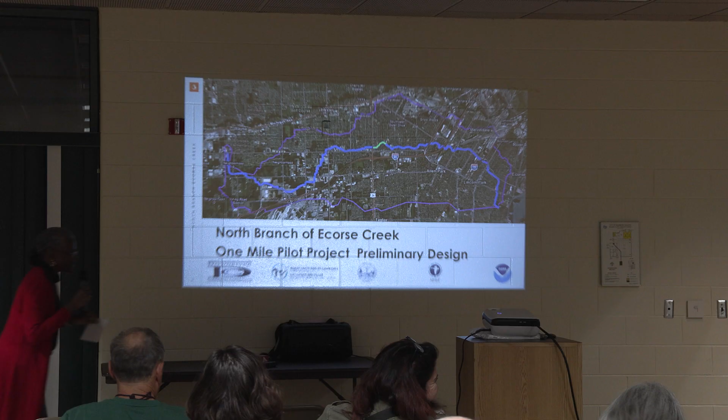Thank you. Hello, everybody. Welcome. We're very happy to have you all here today. This is a collaboration that we've had thanks to Mayor Bazzi. He joined the Cities Initiative organization about 3 years ago, and he has been collaborating very closely with DCC. And they got selected for this pilot project that you're going to get a presentation on today, which is going to benefit all of our residents and the Ecorse Creek floods that we've been having for years now.

I also want to mention that our city engineer couldn't be here, same as the mayor. They're both at our conference today, so they couldn't attend. But any questions that you have, I'll be happy to relay them to them, and they apologize on behalf of that. With the city engineer, he also wanted to mention that this is just one of the many projects that we have ongoing right now for flood mitigation along the Ecorse Creek.

One of the biggest ones that is happening is the $10 million that Wayne County is putting towards the cleanup that we have. That is not what you're going to get a presentation on today, but it is one of the projects that is ongoing all along the entire Ecorse Creek for maintenance, as well as the projects that we have in collaboration with our community and economic development, which are for the acquisition and demolition of homes in the Ecorse Creek floodplain.

So if any of you is interested in participating in those, we have 2 grants that have already been awarded that cover over 40 homes that we're going to be demolishing in the next 2 years. And we are applying for a 3rd one right now. So if you know of anybody that is interested in selling their homes because they're constantly getting flooded, please go and see our new economic development director, Ms. Layal Saad. Can you say hi? She has some forms for anyone that's interested.

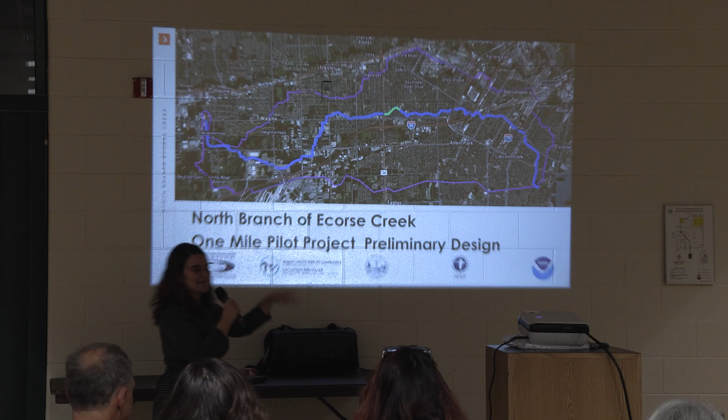You can share it with your neighbors, or if you're interested yourself, you can apply, and we will be happy to put your home in for the next batch of grants that we're receiving. But we're very excited to have the DCC group here and the Cities Initiative Commission presenting the project for the One Mile project we have here. I'm going to introduce Ms. Jasmine Dancy from DCC. She's going to be the main speaker today.

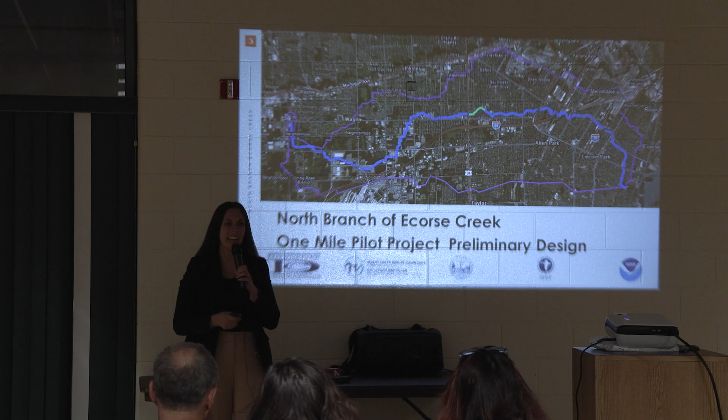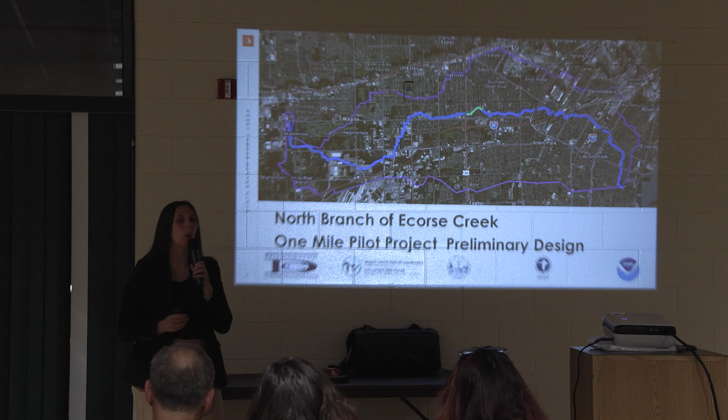I'm with the Downriver Community Conference. The DCC has been around for close to 40 years. We're a consortium of 20 cities in this area, all along the Detroit River, all the way west to Romulus and Huron Township. We work collaboratively on regional issues. Our partnership has been with the Great Lakes and St. Lawrence Cities Initiative. Mariana mentioned that Mayor Bazzi is a board member of that organization. We're thankful to have his leadership represented on this international organization.

So the Cities Initiative, we've been working with them over the last 2 years. They provided grant funds for us to advance different efforts into the design phase. So we all know that there has been an extensive amount of planning done on the North Branch of Ecorse Creek. We lean on those efforts that have come from the Army Corps of Engineers and from Wayne County to inform our work. So we're all working collaboratively together to advance these projects.

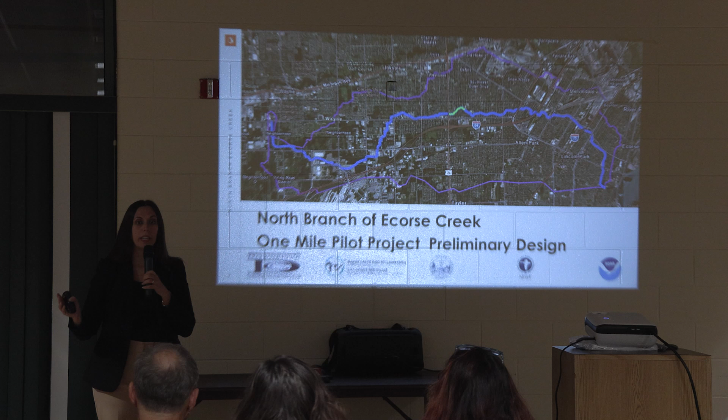So we know that the Army Corps has recommended a huge plan across the whole North Branch of Ecorse Creek that would probably cost upwards of $800 million to $1 billion to do the whole Ecorse Creek revitalization. And knowing that that is such an immense undertaking, our strategy has been to start to break that proposal into smaller projects and take bites out of this problem that's been happening just to start to get some solutions actually happening.

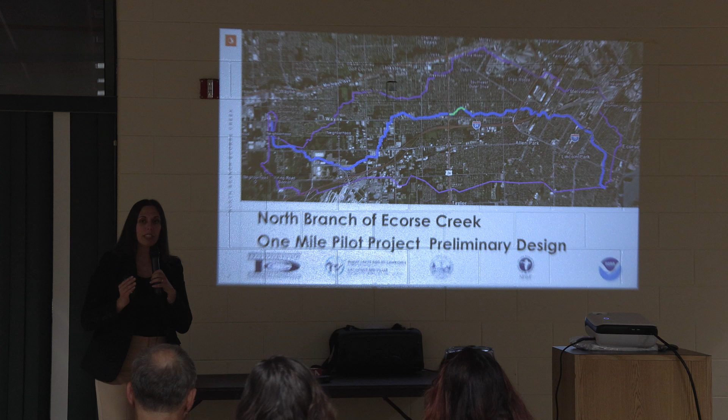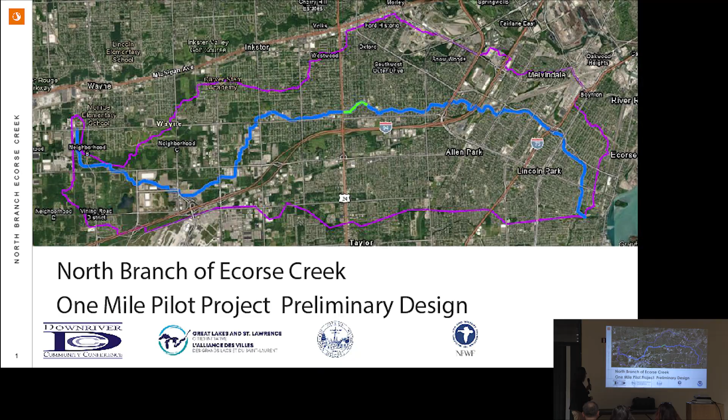So what you're going to hear about today is a 1-mile pilot project for design. We're looking at a 1-mile stretch on the North Branch that is going to be advanced first through this design phase, and I'll talk about the timeline more at the end, to get to implementation and construction in the future. So this should look familiar to you folks.

So here, this is just an overview of the whole watershed, but what I'm going to go through here is a kind of layered approach, and this is what is informing our work across the whole Ecorse Creek watershed. We're going to be using the goals I'm going through as a lens for how to choose and advance and prioritize projects and the results that we want to eventually get to.

So the primary goal is, number one, flood mitigation. We know that that's the concern of our property owners and our friends at the Drain Commission. But we also want to take into account ecological health, and I want to point out our friends in the back with the Friends of Detroit River. They have been a great partner in this watershed and have done a lot of important work that is helping us in this process.

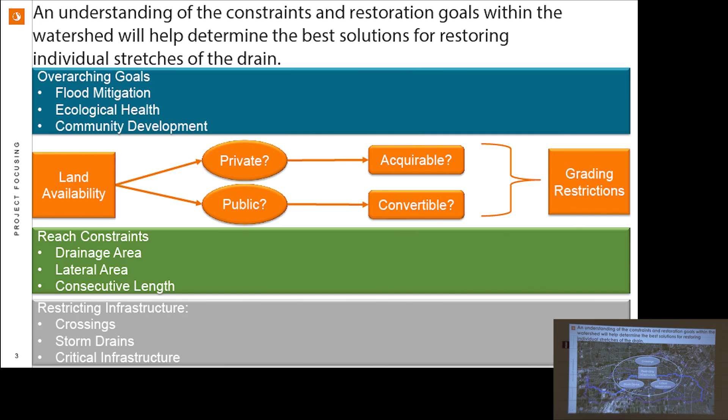All right, so here is our map of the actual 1-mile pilot project. We're really excited to share this. The left boundary here is Telegraph Road. About the middle of the way where the line changes from green to blue is Madison Street. And then you keep going east through Heather Lane Park there. So that is our 1-mile stretch.

Anybody have homes in that area? Okay, a couple of you.

Thanks for coming. So I'll go through, we kind of have it divided at that Madison Street. Like I was saying, west of Madison Street, we don't have as much available land. The properties are really closely abutted to the creek. But as you go further east, with the properties that have been acquired and demolished in the past, in that much larger Heather Lane Park area, you have a lot more land to work with.

So we have it divided into what we call in-line, so in line with the creek improvements to the west, and then offline, which means actually looking at taking the water off of the current creek when you're looking at that blue line to the east. So I'll go through that in a little bit more detail.

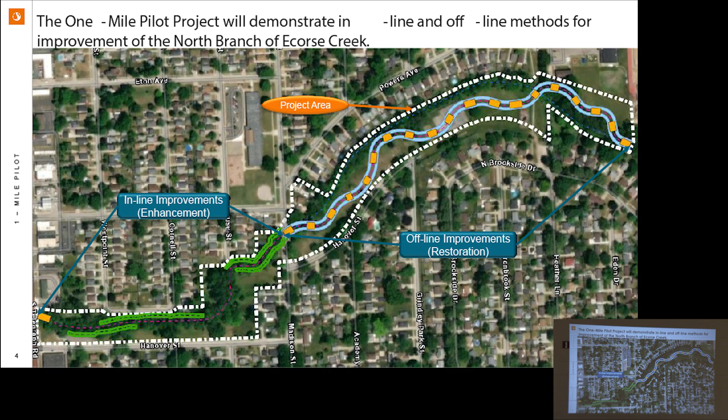So here's these inline enhancements. We have a couple, probably 2 or so different techniques that are proposed here in this design portion.

I'm going to pause and have my friend Ralph wave in the back corner. Ralph is our representative from our engineering team. We coordinate with, contract with Stantec Engineering through the city's initiative, and that's all been paid for through our grant program. I am just overseeing, and happy to be the public face, but Ralph knows these engineering details and can get into some of those more specific questions better than I can. So if anything comes up, Ralph is our guy for that.

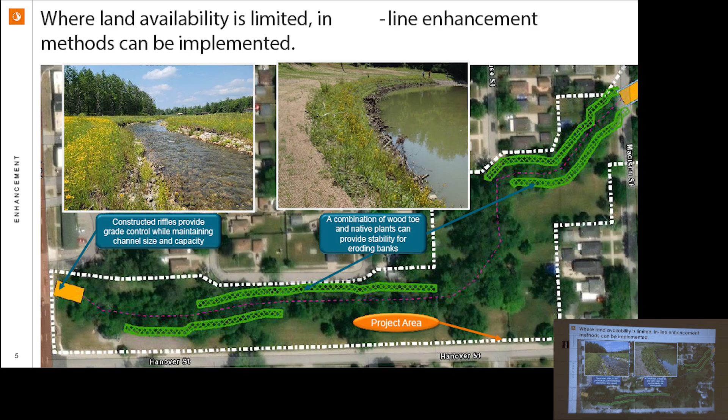So that again is the inline enhancement east of Telegraph up to Madison Street.

Now we go east of Madison Street, where there's much more room, so we're able to do some more substantial restoration practices. If you see the slight dotted line that follows along the top of that green area, that's the current creek — that's where the creek is right now. What we are proposing is taking the actual flow of the creek into the plain of Heather Lane Park and meandering it, creating a more natural type of stream flow.

What that does is give you much more storage for the water. It also slows it down, and those orange boxes — more of those riffles — are much more prevalent there. So it makes for a more natural, pleasing design.

In partnership with the city, they are looking at rehabilitating and redesigning Heather Lane Park with this design in mind. Imagine a beautiful meandering creek where the city can partner to add bridges and a more beautiful parkway with native plants in the area, making it a really interesting, dynamic parkway that also serves the primary goal of flood storage.

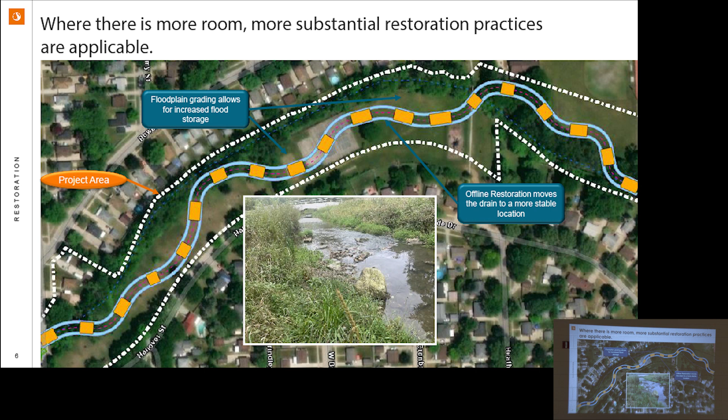This is the part I think is really cool and creative, and it fits the city's goal — having taken those homes out of the floodplain originally is what gives you room to do more of these substantial practices.

As we move forward, we're trying to take this big project proposed by the Army Corps of Engineers and break it down into little pieces. We want you to know we're keeping those original goals, as well as all of these additional options for what is appropriate for each piece of the puzzle. We're truly trying to take a comprehensive, holistic approach that meets all of those goals in a creative way as we move forward.

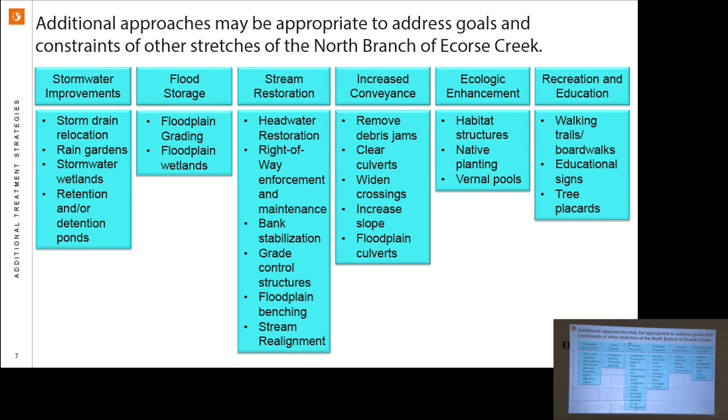So we are working as basically a whole North Branch Creek coalition from Romulus down through Ecorse. That is our vision for this holistic project.

Some of the benefits we believe will come from this specific 1 mile pilot project, once it gets through the design and construction process: number one, increased flood storage. We're protecting property boundaries and making sure the stream bank is stabilized so backyards aren't falling into the creek anymore, and reducing the maintenance required. We know Wayne County has their maintenance requirements and process, but these restoration techniques are designed to allow sediment and water to move freely in a way that prevents future sediment buildup.

Improving water quality, wildlife habitat, and recreation potential. We think those are all very important, and things you can see in a more healthy creek.

Once we get through to implementation, we're really excited to take what we've learned here and expand it to the rest of the creek. We see this as a replicable model that we can take downstream, upstream to Romulus, all the way through to the mouth of the river.

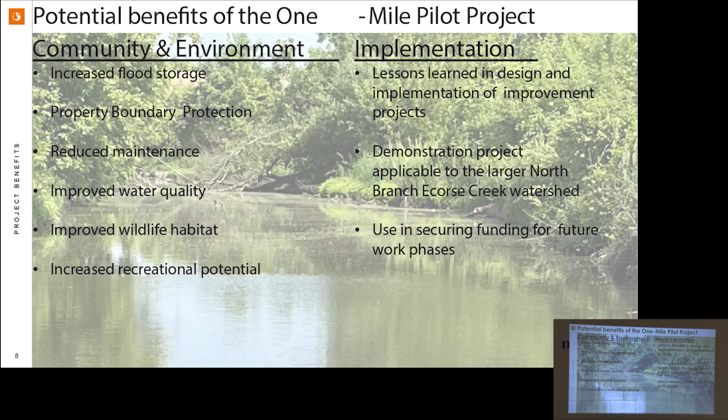We are working to secure funding in future phases. We're calling this a pilot project, a demonstration project, to prove to these big funding opportunities and granting organizations that this is important, valuable work for this area, and here's what else we need to do. It's really leveraging all of the work that's already been done here in Dearborn Heights and showing it to a bigger audience.

So with that in mind, we are finalizing this preliminary design in early next year. We want to take the feedback that we get tonight from you guys. We'll be taking questions afterwards, but also please feel free to write them on your cards or send us an email afterwards. We want to incorporate all of that. This preliminary design is not final, and there will be continued opportunities for community input and feedback as we move forward.

Once we complete this 30% design, as they call it, we'll want to take that through to complete design, engineering, and then construction. We need funding for all of those steps along the way. There is no funding allocated for those next steps currently.

I do want to be honest that we are utilizing grant funds as they come. The City of Dearborn Heights is being very proactive about securing grants for multiple projects, all for the benefit of the issues going on with Ecorse Creek. But for this particular one mile stretch, our team still needs to secure additional funding for the final design, permitting, and construction.

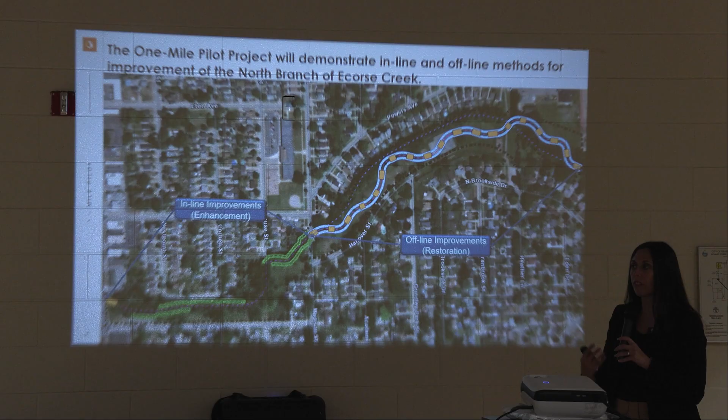So I don't want to speak on behalf of the city, what their strategy is when they are removing those homes, but I think FEMA's intent is, if you're moving homes out of the floodplain, then that is the mitigation work. But were other communities required to remove homes? Not that I'm aware of. I don't know for sure, but I don't believe so.

And Dearborn Heights is one of the hardest hit, so that's why FEMA gives you guys so much attention, because there's so much flooding here. We know that you guys are more at risk. But I don't believe there have been any other communities that have taken advantage of that opportunity to clear homes from the creek, though I don't know that for sure.

FEMA awards these grants to every community, though I don't know if other cities take advantage of it. I know historically in the city of Dearborn Heights, we have been purchasing homes for many years already, which is how we managed to have the piece of land that they're using as the pilot here. We continue to take advantage of that because our residents are the ones who suffer the most.

As I mentioned earlier, this is a voluntary purchase. We're not kicking anybody out. We're just offering the opportunity for those that are tired of the floods to relocate to a different location with the FEMA grants. We have been lucky that FEMA has provided an even larger amount of grant this year.

In the past, they would only do 75% of the cost of the project, and the city would have to put 25%. Those were the old houses that we purchased. The new batch that we're purchasing right now, which is the 40 ones that we have, they're actually matching 90% of the cost, and the city is only putting 10%. I don't know if other cities are willing to do that match for those grants. In our organization with our city council, they see the need for this, and they have consistently voted in favor of getting the residents out of those horrible situations.

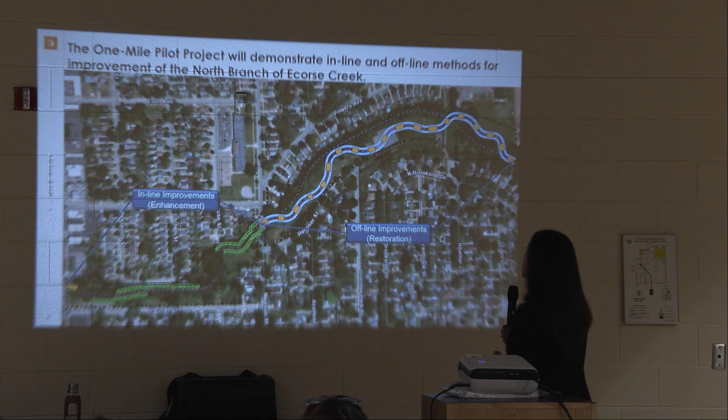There's another question? Yes. That map there in the lower left-hand corner, the project actually starts at South Telegraph, or does it not start until Madison? No, this is Telegraph here, right here. Madison Street is right here.

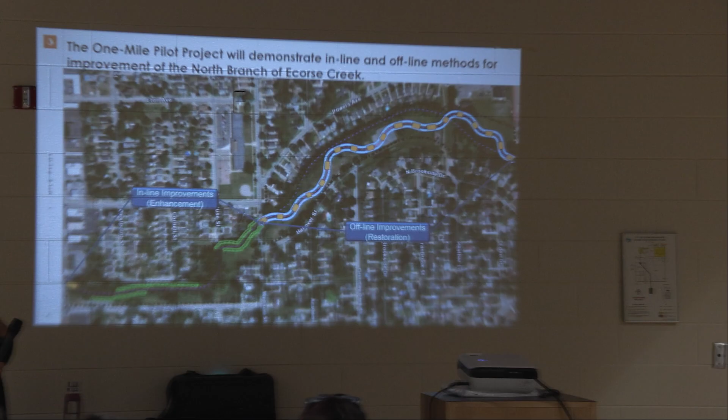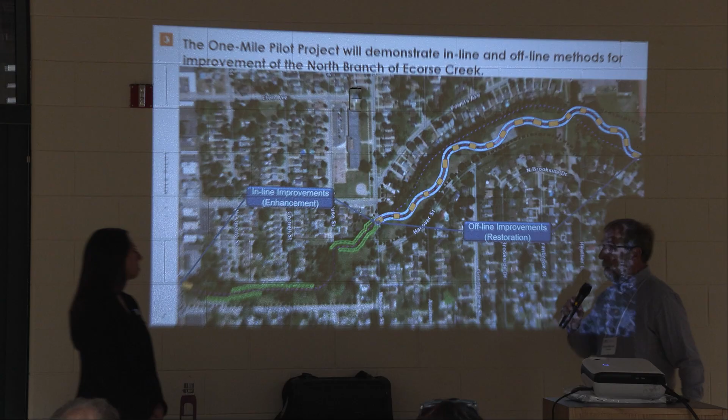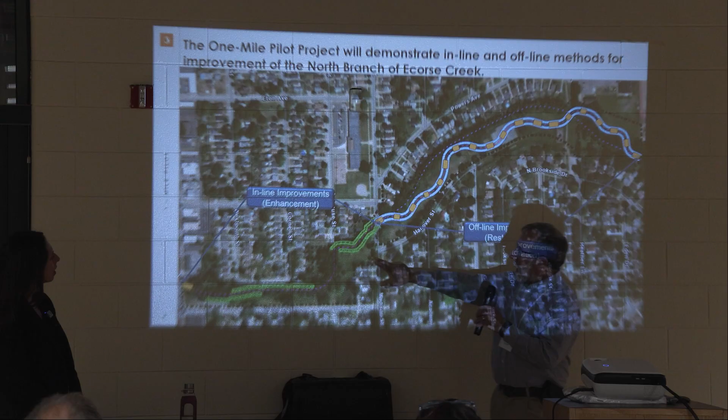There is an open area along Hanover, and I was curious why you didn't change the flow of the creek in that section between Telegraph and Madison. That whole section to the left is a wide open area, and I was wondering why you didn't change the flow to increase the length. Why did you do the same thing up there at the top in the blue? One of the reasons I'm not exactly sure why this particular corner wasn't used, other than it's a very small area. We did this between this road and this road. We had that whole length that we were able to realign the stream.

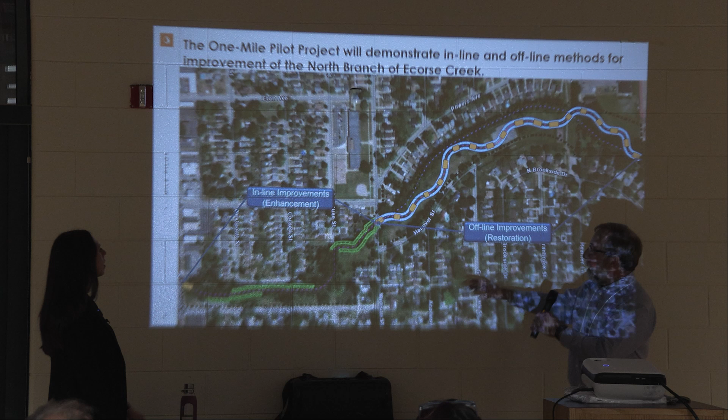You wouldn't be able to do that here. You might be able to provide a little bit of detention, and we may look at that as we move forward with the additional design. But I also don't remember if there was any property issues there. There could have been property issues on that.

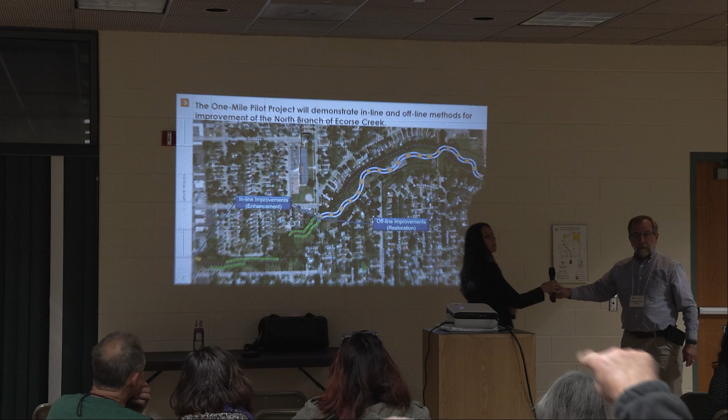That's all city owned, yeah. That whole section there is city owned, where the first fire station used to be. I just didn't know there's no homes east of that, it's a field. My kids used to ride their bikes in that field. That fire station was falling into the creek too, and that's been gone for years.

We'll definitely make a note as we move forward to finalize this design to see if there's any room for additional meandering. Is that what you're suggesting? Some additional, yeah, okay, that's great, just to the west of Madison Street with that property there. Yeah, it looks to be open, so.

Is this presentation available online? Not yet, but we're happy to provide it to the city and they can get it on the website. I believe the presentation I did last month to the Ecorse Creek Commission is available. It's similar to this, but we're at more detail now.

Okay, one further question. You talked about $800 million - that seems huge. At DCC, are you envisioning that the 12-member communities might have to establish a special taxing district to help pay for that $800 million? That is not on our list of ideas. There is a mechanism through the Wayne County drains petition process - property owners along the creek could be assessed fees to offset a project, if Wayne County chooses to do that. But that's not what we're advocating for. We're looking for other opportunities to get funding through federal grants primarily, and looking at foundations for match dollars.

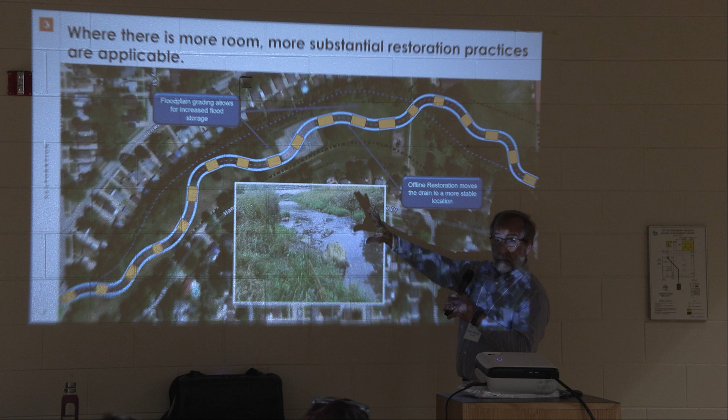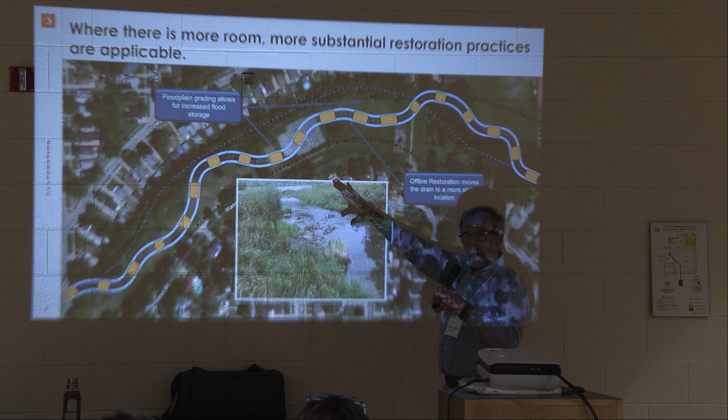Plus, doesn't meandering slow the water flow down? Instead of a straight line, speeds the water up. It does slow it down, but part of it is all this - what you refer to as a retention basin is like floodplain storage, which would be the natural way a river would store water. So that's what we're trying to do - put that water that would normally end up in somebody's backyard into this flood zone. The river's going to be lowered, and where you see these two dots, that's going to provide floodplain storage during events. When there's not events, that can all still be parkland. So you just wouldn't play in the park in the middle of a rainstorm.

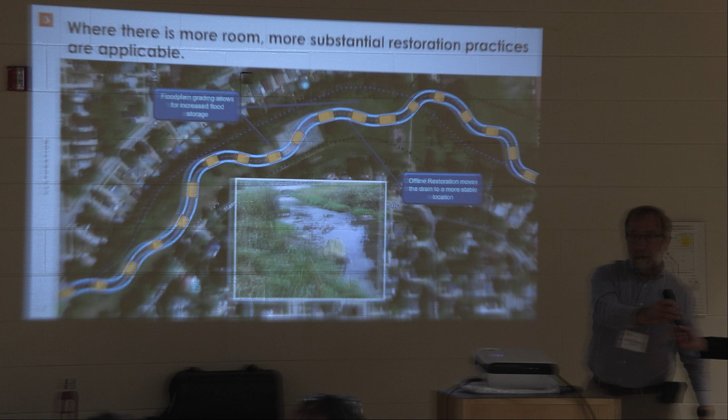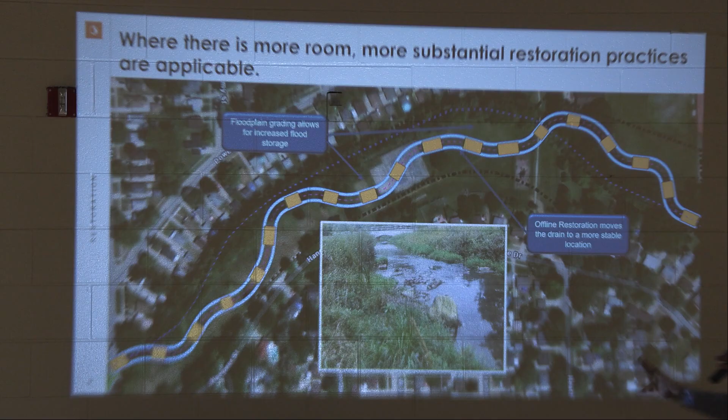I did some study and found out that lowering the river doesn't do anything - you can lower the river 100 feet and it just builds 100 feet of water. But we're doing more than lowering it. All this area between these two dots is going to be excavated down as well - that's what will provide the storage.

Lowering the river channel itself is not... that's going to be a wide open area. When it floods, it's going to be all flooded. And then when the waters go down, it's going to be a big mucky area with mosquitoes.

My kids play in that park. They call it Bear Park because the playground has a bear. They play right across that bridge. They're not going to have tennis courts there, or pickleball courts. We already funded money for that. Going right through a park, we have too many parks in Dearborn Heights. Let's just get rid of one that we have. This plan here, to me, it's senseless.

So you would like to see none of this, and you would just want to install your tennis and pickleball courts here and not change the creek at all, not provide any additional flood storage. Is that what you're recommending?

Well, let's do it someplace else. Why do it in a park? We've got a place on Hanover Street that's just that big, just east of that. Just east of this on Hanover, we just bought out 14 houses.

I appreciate your comments, and we can definitely take note of that. Why don't we put every penny that we get, every grant from the Detroit River to Romulus, into that retention basin? It would have paid for it by now.

If you're referring to the Powers Basin, that's the Army Corps project. That's the one, Powers Basin. There's, in the Army Corps plan, other basins proposed. It's not just that one. And I don't have the data on the Powers Basin, but I believe the Powers Basin, once complete, will provide flood storage for a 2-year flood event.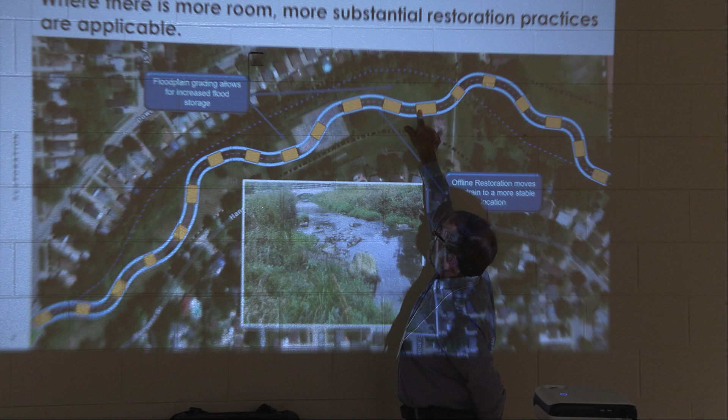Question in the back. So by your dots, you're representing where the channel is, that's going to be your deep channel. And then you were talking about sloping, coming out away from that with a sloping grade down. So when we do get overflow from the creek, it's still going to be retained in that. So you're talking a 15, 20 foot main channel, with how far out are you sloping out?

You mean the width of the main channel? Yeah, well, I get the main channel part, but you mentioned that you were gonna have a graded down towards the creek. Yeah, so each of these areas where the bends are, that will be graded as floodplain. So it will be graded towards the river, but only slightly. It'll be pretty much flat until you get up towards those black dots, which is the edge of the easement.

Does that make sense? Yeah, I'm sorry, I missed the last part of what you said, but I get the main channel, and then you're sloping way out. Yep, so as it floods, it's gonna stay, the channel's gonna expand out. Correct. And until it overflows off? No, the river's not, no, that's the whole key. The river's gonna be about the same size, the channel width. It's the floodplain that's important to store the flood water.

And it'll come out, that 2-year storm you mentioned, that's when it is designed to come out of bank, when you get to that level. Sorry, is that one of the reasons you're moving it away from those houses' backyards?

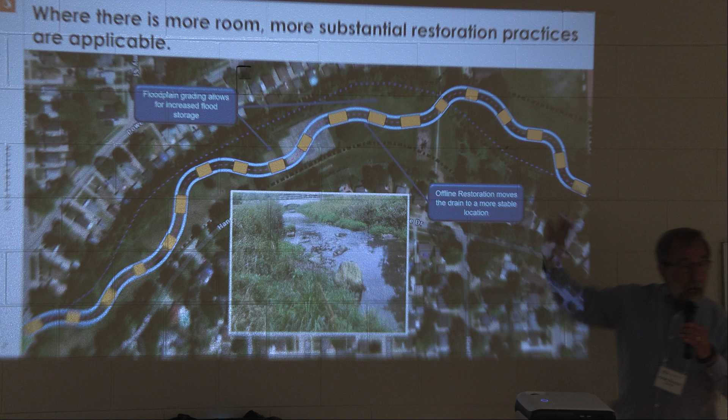It seems like they would be, if you're bringing it out 30 feet closer to their homes. What we're gonna have to do is make sure, like here, that we're far enough away and provide enough protection on the bend to make sure it doesn't erode up to the house.

I live on that end of the street, and on the other, closer to Van Born. I can't go down that street when it rains. And it makes me worried that it's even gonna be worse before this gets better — probably not noticeably better until we're able to do additional work.

It'll reduce the occurrence of flooding a marginal degree, but until we do additional work, it probably won't have a cumulative effect. Okay, like she was saying, because I live on Academy also, but a little bit north of her, so a little bit closer to the creek.

I can remember standing at that intersection of Hanover when the houses were still there, talking to Mayor Coletto, when he said FEMA's gonna do this. I even asked him, does that mean if those houses come down, the water's gonna come down Academy towards Van Born even more? Because those houses — the water used to fill up the Colonials, their basements.

So the homes themselves were providing flood storage, is what you're saying. The water's going to continue to come towards Van Born Road. Right, and there's sidewalks there. People actually use the drive-across bridge at Madison Street, and walk across that whole area where those homes were, a sidewalk, to get through Heather Lane Park, to go that way.

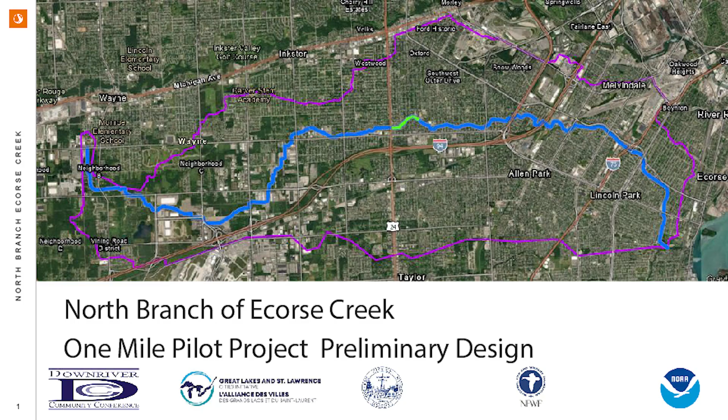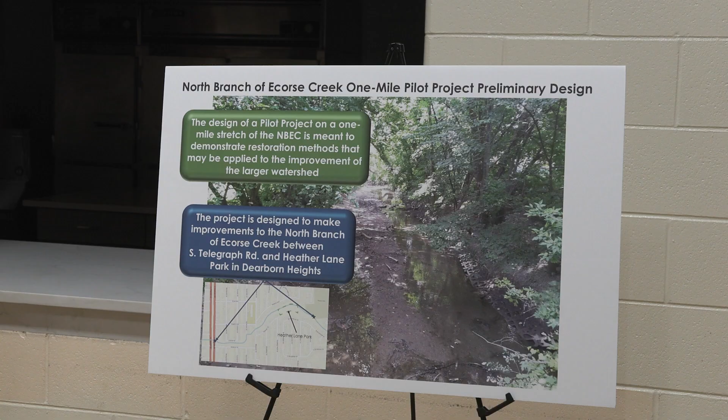Hi, I'm Ralph Resnick, I work with Stantec Consulting. I'm an environmental engineer, part of the team that developed the pilot design for the North Branch Ecorse Creek project. We're happy to be working with all the partners, and happy to be selected as the engineering consultants to help restore the North Branch of the Ecorse Creek to a more functioning stream and reduce flooding in the area, which is probably most important to local residents. We're using a technique called natural channel design to put the natural shape and dimension to the river. After we're done, we expect it to be full of enhanced habitat and flood control by expanding the floodplain along the riverbanks. The first pilot project is a 1 mile stretch that we hope to use as an example for the whole North Branch Ecorse Creek Basin.